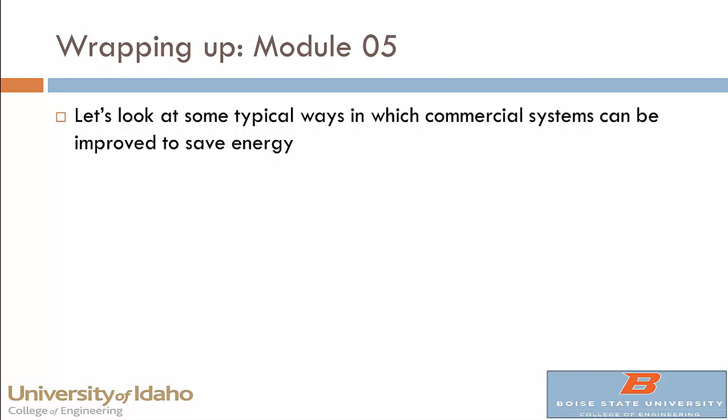In this module, we're going to talk about energy savings opportunities. We're kind of wrapping this up, right? We've had bits and pieces of the different technologies that show up in industrial refrigeration systems, and we've talked about how we analyze those. And so today we want to talk about the typical things we look for when we're visiting a facility and how we recommend that they save energy with that.

So quickly review here, right? The refrigeration systems are almost always based on the vapor compression cycle, and they have these four components: the compressor, the condenser, the expansion valve, and the evaporator. And these are typically what they look like. The expansion valves, by the way, are usually hidden. They're pretty hard to see when you're walking through a facility, but compressors are pretty obvious. The condensers, as we mentioned, are on the roof, and the evaporators are in the cold space.

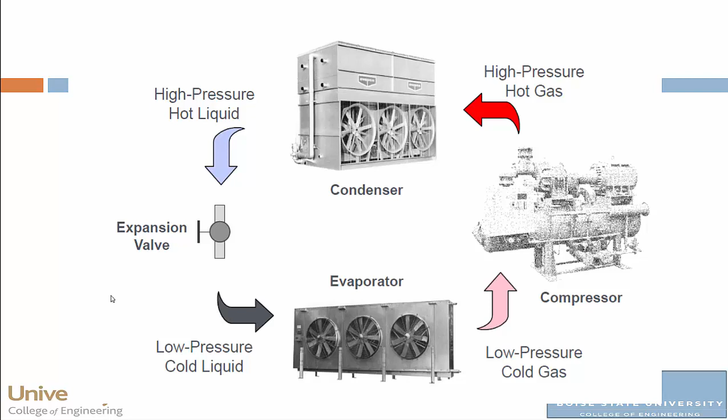So the first thing we can do is eliminate things that are adding heat into the cold space. That seems kind of obvious, right? But you'd be amazed at what we find. For example, freezers, refrigerators, and these cold warehouses, they need some lighting. And if you remember from any analysis of lighting, in almost all lighting systems, about 90% or 98% of the energy that goes into lighting ends up as heat.

So if there's incandescents, that's a really bad place for them, though those are rare these days. But even fluorescent lights, every 40-50 watt bulb ends up adding about 40 watts into the heat of the building, which has to be removed by the refrigeration system. So this is a great place to recommend both occupancy sensors to turn lights off when no one's there, and LEDs.

In these big warehouses, you have forklifts coming and going, moving pallets of frozen French fries and things around. Forklifts give off a lot of heat. And so you might want to go to, say, electric forklifts if that's possible. Check the insulation. Make sure that there's not insulation falling off the wall. Make sure there's not places where they missed it. Make sure the doors seal well. They should all have weather stripping. You should never be able to see any light around a door.

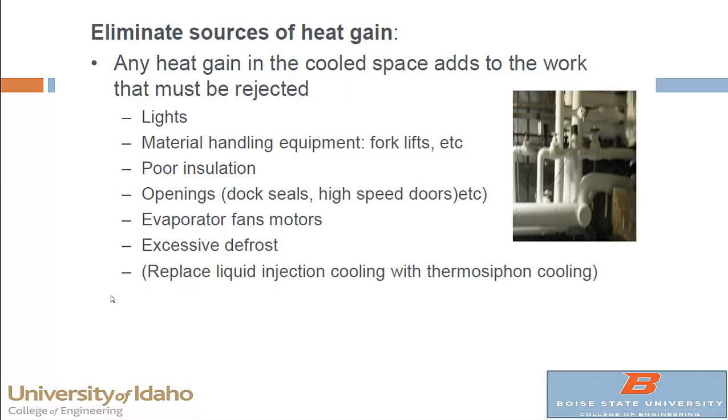Another broad area that we can look at is reducing the fan energy. We talked about that on the evaporators and also on the condensers, right? And there's two ways to do it: either have more efficient motors, but more likely control them somehow. Usually, in the less sophisticated systems, these fans are just always on. You just turn them on, both in the evaporator and condenser, and let them run.

But you don't always need them. So the evaporator fans can be cycled on and off. Same with the condenser fans, but even better is if we can put them on a variable speed or variable frequency drive, and you can save a lot of energy that way.

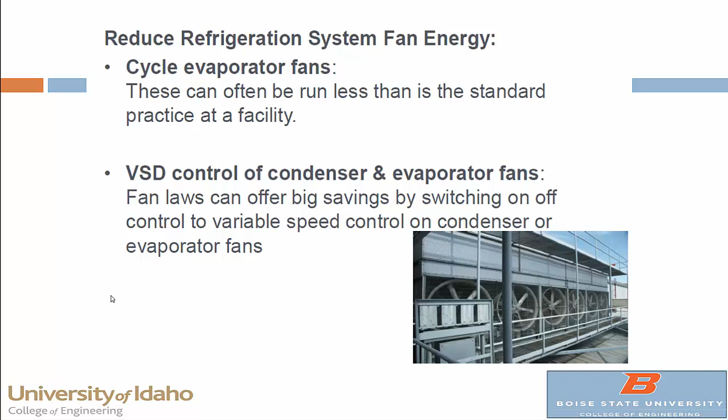And then look at the operating regime of your system. So, the outside temperature, here's a little kind of cartoon. Let's say the outside temperature is 70 degrees Fahrenheit, and your refrigerated space, the freezer we're working with, is -5 Fahrenheit, which is pretty typical. Well, that means that the condensing temperature, the temperature of the gas that's coming out of the compressor, has to be quite a bit higher than ambient because they have to be able to drive the heat to the ambient. So maybe that's 15 degrees higher, so that's 85 degrees.

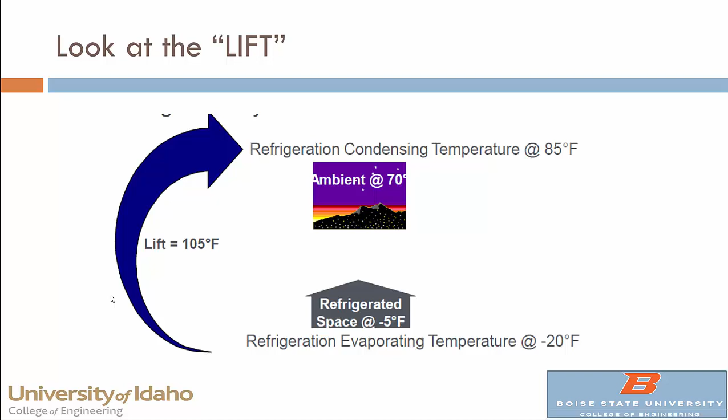And the refrigerant that's in the evaporator has to be considerably lower than the refrigerated space, because again, you have to suck the heat away. The heat has to be driven by a differential. So another 15 degrees, so that's at minus 20. That means the lift, the difference between the low temperature and the high temperature, is 105 degrees Fahrenheit. And the overall efficiency of the system is really driven by the lift. The higher the lift, the less efficient it is. So anything you can do to try to drive those two things closer together really improves your efficiency. So you lower the lift by either lowering the top pressure or raising the lower one.

Okay, so the discharge pressure, that's the pressure in the condenser. And that's being set usually by a combination of how the condensers are being controlled and how the compressors are being controlled. And the whole idea here is to try to get more surface area, more ability to transfer heat in the condenser, so you can do it at a lower delta T. So you can run it at a lower temperature, which means run the compressor at a lower pressure. Sometimes that means maybe we could recommend adding another rooftop condenser if there's space for it. For a really big system, that might really be useful.

Often, if they're old condensers, the fill, the area where the water gets sprayed on them, is full of scale, right? So maybe they need a better maintenance plan for it. Maybe the fans aren't running as well as they can be. On the bottom side, ask them if they really need to be running at that full low temperature, that low suction pressure, right? So we might be able to just raise that up a little bit. So that's the bottom bullet point there.

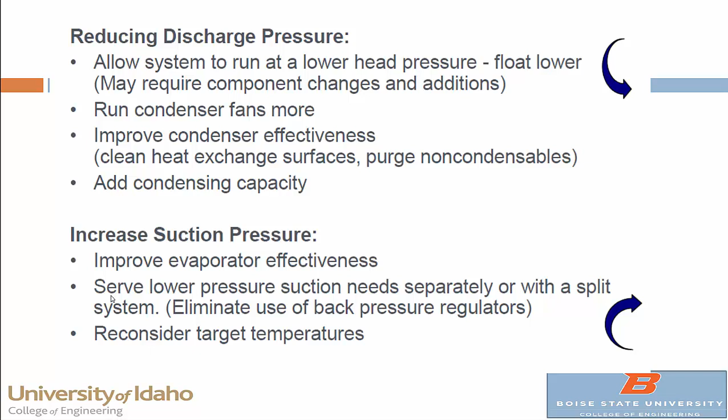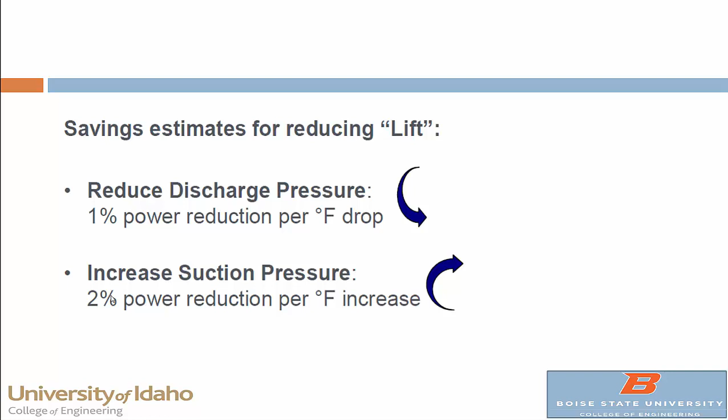Reconsider temperature targets. That's the kind of thing that can cost very little to implement, but it can save a lot of energy, because for every degree Fahrenheit we lower the saturating pressure on the condensing side, we can save up to 1% of the power. For every degree Fahrenheit we raise the suction conditions, that's 2% power. So you can really make a big difference just by changing some settings. And often the operators don't even know whether those were the right settings. In other words, you ask them, did you try something different? When was the last time you evaluated this? This could be a big game changer for them.

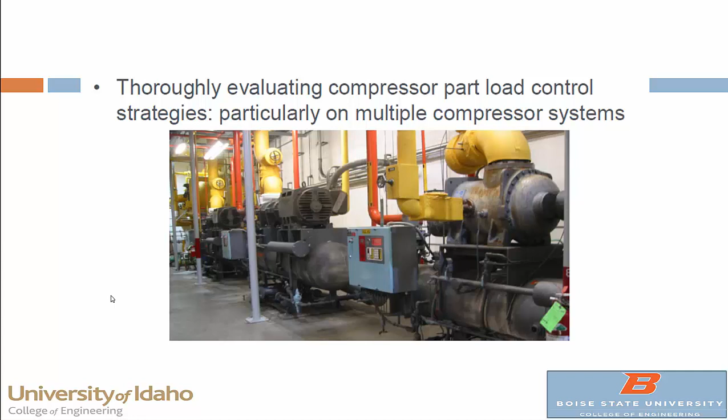You don't need a variable frequency drive on all three of them. If they're running full capacity, they're fine. You won't benefit from a VFD. So usually you just need one of a bank of compressors to have a variable frequency drive, and that's particularly important if you've got a system where the load can be highly variable. In other words, there'll be sometimes when you only need one compressor, sometimes you need all three. That's where you can really benefit from a variable frequency drive.

Okay, so that's a really quick overview, but I want you to spend some time with the readings to get a better understanding of it. So I've got 3 readings posted, and they're fairly simple. They're very brief. You should have no trouble getting through them. One's a very short article called 10 Cooler Ideas, and they basically highlight 10 measures that we could use to improve energy efficiency.

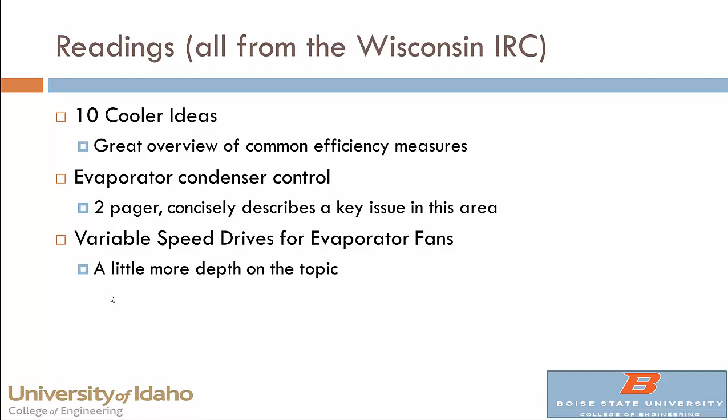There's another one, a very brief one called Evaporator Condenser Control, there's a typo, evaporative condenser, so it's controlling the rooftop units. And then an ASHRAE article on variable speed drives for evaporator fans. These all came out of a group at the University of Wisconsin-Madison called the Industrial Refrigeration Consortium. They have provided really excellent information on how these systems work.

So floating head pressure control, basically what that means is we want to change the way the compressors are controlled to let the condenser decide how much cooling you need, how high the temperature of the discharge has to be able to reject the heat. It's usually just a control system change, and it can make a big difference.

And that was the whole point in that homework assignment about looking at the bins of wet bulb temperatures for the condenser for a typical meteorological year. It can tell you when you can run the compressor at a lower temperature. Saves a lot of money there.

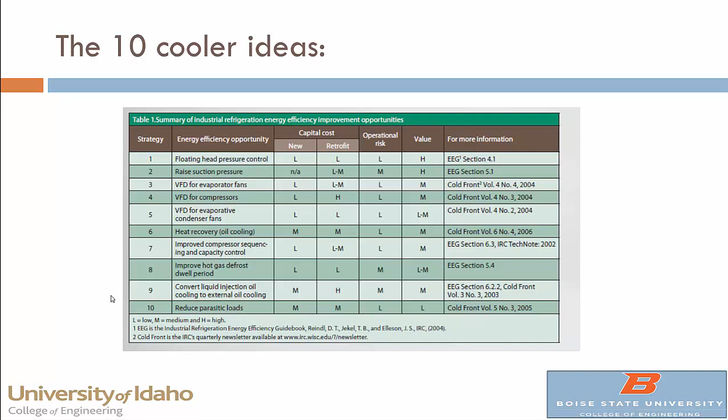So that's pretty much it. Do the reading. I'm going to have a quiz posted soon that'll be based on those readings. No problem set associated with this. So this is more informational, and then in 2 weeks, in the second week in November, we will post the final project to be able to wrap up the whole class, and hopefully be able to wrap it up before your finals week for your other classes. So that's it.